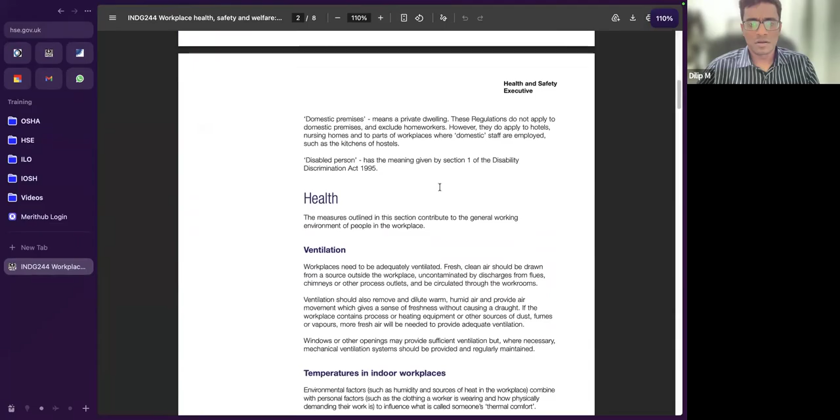Yeah. Welfare facilities are those that are necessary for the well-being of your employees, such as washing, toilet, rest and changing facilities, and somewhere clean to eat and drink during breaks. Okay. I'm just going through, so you are aware what information or what content you can find. So later you can use them when you're preparing the risk assessment.

So toilet and washing facilities. Okay. You have to provide adequate toilet and washing facilities. So what is meant by adequate? So when they say adequate toilet and washing facilities, it means you have to provide enough toilets and wash basins for those expected to use them. Okay. So you don't want people to stand in a long queue to use the toilets or wash basins.

For example, if the ratio of toilets or wash basins is 1 to, let's say, 30. Okay, that would make people wait in a very long queue. Okay, and then where possible, separate facilities for men and women. Okay, the facilities to be clean, and then a supply of toilet paper, and for female employees, a means for disposing of sanitary dressings, facilities well lit and ventilated, hot and cold running water.

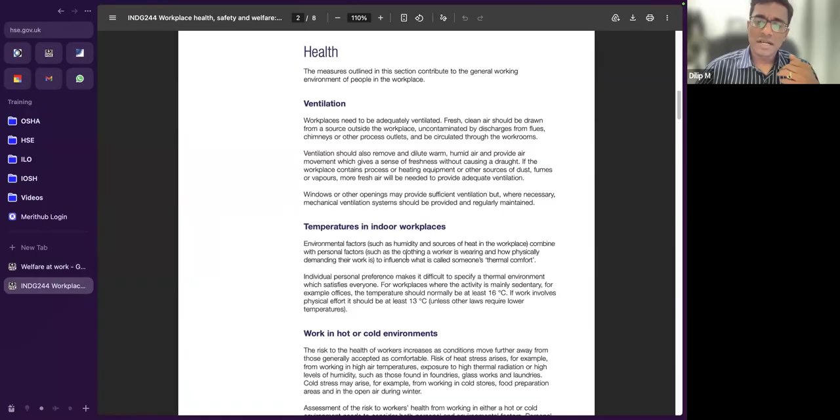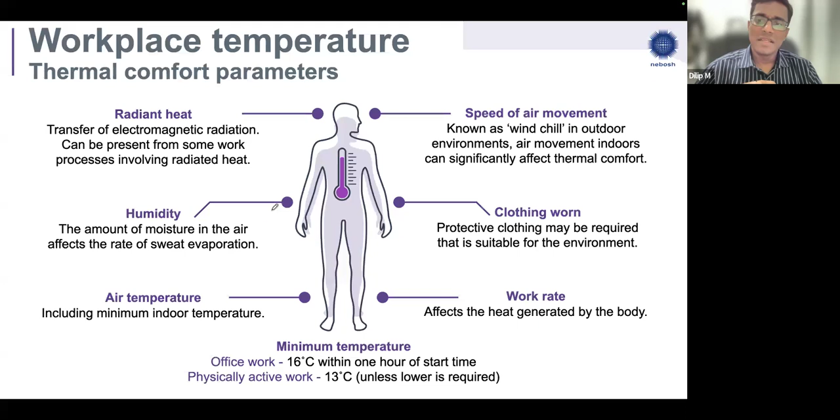Now, there's another document which talks about ventilation, temperatures, lighting, and the cleanliness and workstation and seating. Okay. Anyway, we will come back to this in a moment. So, workplace temperature. People may work in areas where the temperatures could be extremely hot or extremely cold. Examples of hot temperature environment: working in foundries, glassworks, laundries, or working outdoors, constructions during a hot summer. Similarly, a cold environment: working in cold stores, food preparation areas, and in the open air during winter.

So when people work in extremes of temperature, what happens to our body and what are the consequences to our health? Now, the law will not tell you what is the minimum temperature or what is the maximum temperature you should maintain indoor, because the thermal comfort of an individual will vary from person to person. For example, for me, my thermal comfort could be like 22 degrees Celsius. For Vinod Kumar, the thermal comfort could be 18 degrees Celsius. Or for another person, it could be like 25 degrees Celsius. So these thermal comfort varies. Therefore, the regulation does not specify the minimum or the maximum temperature, but it gives you some guidelines.

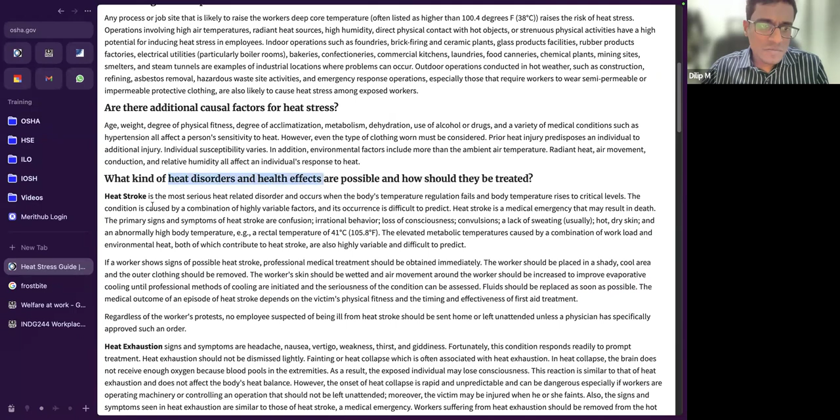So heat disorders: heat stroke, heat exhaustion, heat cramps, heat rashes, heat fatigue. Okay. And looking at the control measures, general ventilation will dilute hot air with cooler air, air treatment or air cooling, and then heat conduction blocking. So simply, blocking the radiant heat through any hot pipe work or any machineries; they must be insulated.

And apart from that, in terms of administrative work controls, acclimatize workers. So we must expose the worker slowly to these increases in temperature. For example, for new workers, where heat levels are high enough to produce heat stress, you may acclimatize with a regimen of 50% exposure on day 1, 60% on day 2, 80% on day 3, and 100% on day 4.

So, for example, on day 1, you expose them to like 2 hours in a working day. And then you slowly increase the exposure, like day 2 or day 3, from 2 to 3 hours, and then 4 hours. But if you immediately expose them to these high temperatures for a longer period of working hours, that would increase the risk. Okay, so that is the meaning of acclimatize. Likewise, when you're exposing them to a cold temperature, you must gradually expose them so their body would adapt to the changes in temperature, and it would reduce the risk of consequences.

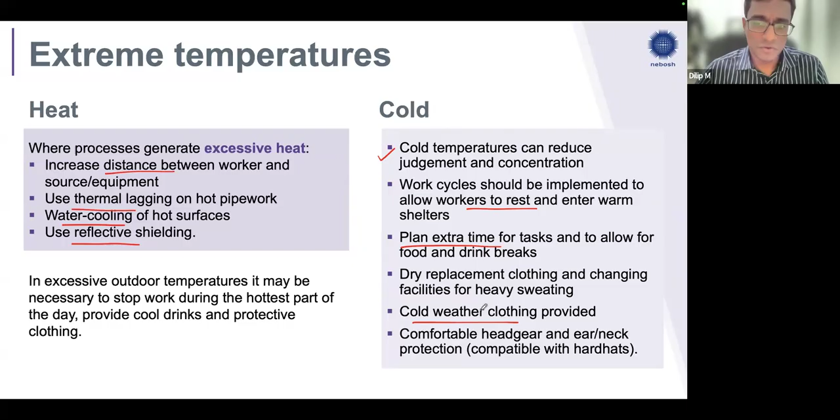Cold weather clothing provided. So provide them with jackets and thick trousers. That would be ideal for a cold temperature environment, and provide a comfortable headgear and ear and neck protection, covering the extremities of the circulatory system: your ears, your nose, your fingers and toes. These will ensure your body temperature does not reduce, and also ensure there is a continuous blood flow.

So training is important whether you're working in a hot or cold environment, because workers should clearly understand the signs and symptoms their body shows from working in a hot or cold environment. Recognizing symptoms that may lead to heat stress or hypothermia. So hyperthermia is a condition where your body temperature increases. Now the opposite is hypothermia, the body temperature reduces. And then being able to perform rescue and first aid measures, and recognize the increased risk of incidents. These are symptoms starting from headache or dizziness, fainting. All these could be considered significant symptoms.

So be aware of the importance of physical fitness. When we talk about physical fitness, good sleep is also a very important requirement. And then the importance of a balanced diet, and the importance of hydration and maintaining the salt level, because you're also losing salt from your body through sweating. And then the effects of drugs and alcohol. So no alcohol, no caffeine, no sugary content, because all this would make you tired, especially when working in a hot environment.

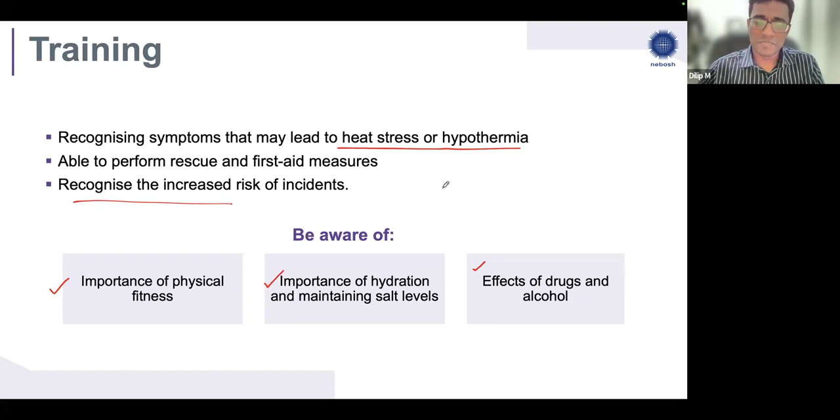Okay, so these are all covered as part of training and providing increased awareness. This would significantly reduce the risk when people know how to protect themselves from exposure to adverse weather conditions. So next is working at height.

Work at height is subject to where there is a risk of fall. Okay, so if there is a risk of fall, and where the fall could lead to a potential harm, then we define it as working at height. So what affects risk from working at height?

Okay, so there are many workplaces or work sectors where work at height is very much a routine part of their work. For example, construction workers would be working on roofs, doing installation or maintenance, or they would use access equipment to gain access to a structure. Okay, so there is significant working at height involved, particularly in the construction sector. So what affects the risk from working at height?

Okay. If you're using access equipment which is poor or unstable... yes, we work at height offshore. Okay. Correct. So any access equipment that you're using, provided it is faulty or unstable, will increase the risk of work at height. Okay. Now, access equipment.

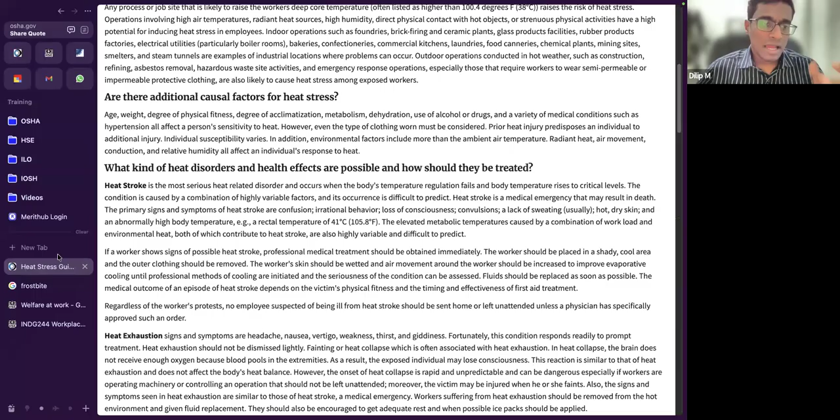Okay. So when using this access equipment, if the equipment is unstable, like think about positioning this equipment on an uneven floor, or where there is a high wind causing the equipment to become unstable, so you fall from height. Okay, so that is one of the risk factors, falling from height where your access equipment is unstable or in poorly maintained condition.

Okay, and then the second risk factor is the vertical distance. Increased height means increased injury risk. So the more the height, the higher the fall distance. For example, a person falling from 3 meters or 6 meters or 10 meters. So the higher the fall distance, the higher the risk of injury. But again, even falling from a 2 meter height could cause fatality. Okay, so vertical distance is another risk factor that affects working at height, and then unprotected edges.

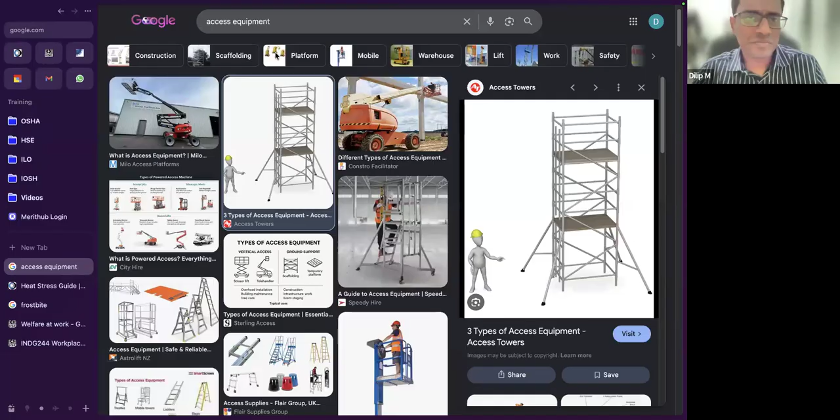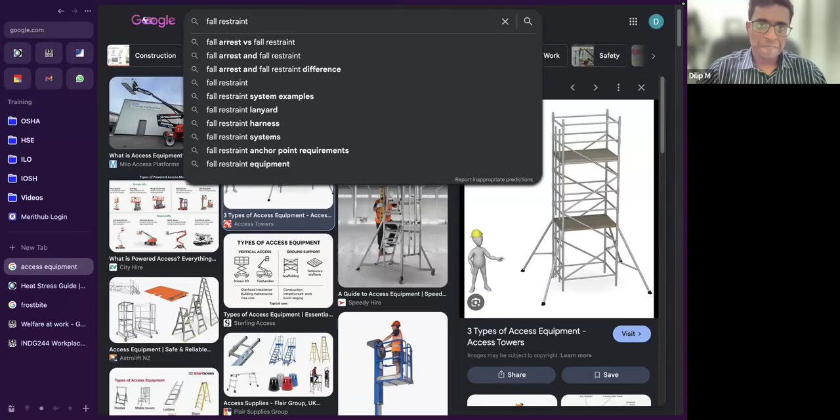Safety harness. Harness is fall arrest system. So this is fall restraint, like the belt. Okay. So you see here, this restraint system or the belt will ensure that you do not access the edge of the roof, because the belt will only provide you access before the edge of the roof. So this is restraint system. Okay.

So you could see in this image, you could clearly see the length of the lanyard of the belt will not make you gain access to the edges of the platform. So this is restraint system. And fall arrest is, it will arrest your fall, which is the harness. So it will not prevent fall, but it would arrest your fall. Again, minimizing the consequences. Okay.

So restraint systems to prevent workers reaching areas with a fall risk. Okay. And working from solid surfaces or roofs with permanent fixed guardrails. And then where preventing fall from height is not possible, the next step is minimize. Equipment that minimizes the distance and consequences of a fall. So where fall prevention is not possible, the next step is how you minimize the distance of the fall or the consequences of the fall.

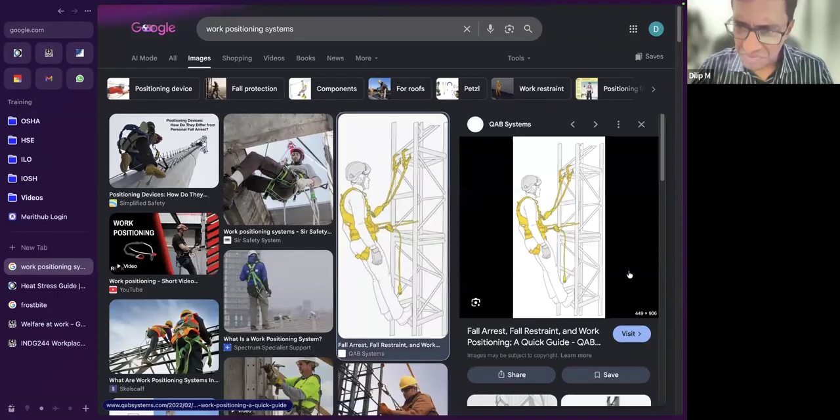Okay, so using fall arrest systems, and then using work restraint and work positioning systems. Now work positioning systems, like where they want to gain access to a long pole, or even for tree climbing. So you could see here, this is the work positioning system. Okay. And then rope access system, very similar to that. So again, you could see

very much used to clean the glass windows of the building. Okay, and also to gain access to any such structure where it may not be feasible through any of the other access systems. And then safety nets, so it provides you a soft landing. Okay, and similarly the airbags. Okay, they do not prevent fall, but they minimize the consequences of the fall by arresting the fall and by providing a soft landing. So with the safety net, there should be a good ground clearance, so that when someone falls on the net it will expand. So that expansion should not hit the ground level.

And similarly, airbags. These airbags are very much ideal where it is a low fall distance, but safety nets could be used for a high fall distance. So all these restraint systems or fall arrest systems or safety nets, they should be subject to thorough inspections and testing so that they are in good condition and they are active when needed.

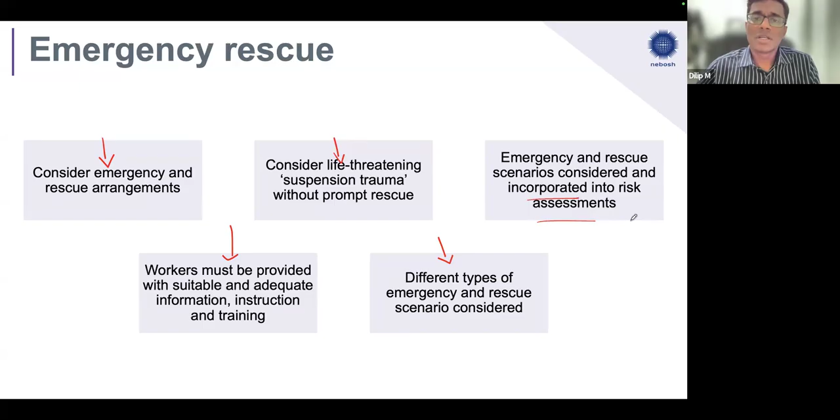Okay, or where the platform collapses and the worker might again be trapped between the platform and the ground. So these are all the different types of emergency and rescue scenarios that should be considered and appropriate procedures to be developed. And these procedures must be incorporated into the work type specific risk assessment. Okay. So provision of training and instructions. Training forms part of the route to competence.

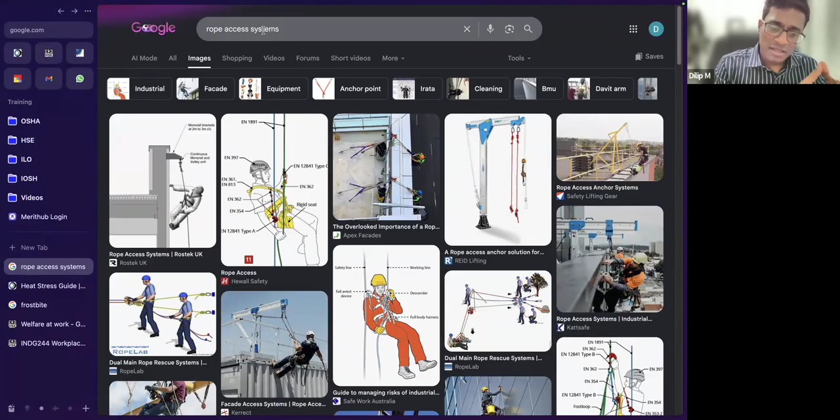Competent people are also required for using different types of platforms, which we would be covering in the next few slides. Different qualifications are available for variations of working at height equipment. For example, rope access, which we saw. Okay, there is a separate certification body for doing this rope access work. Okay, so a different accreditation body, and those people, apart from work at height training, should also be certified for rope access, and only then would they be competent to use these rope access systems.

So different qualifications are available for variations of work at height, and also competency for installation, erection or dismantling of scaffold. Okay, and then instructions must be provided on how to use the equipment safely, and instructions on hazards. So what are the potential hazards of working at height or using such access equipment, what circumstances could cause fall of people or fall of materials, and what is required to ensure that it does not cause harm. So all these are considered as part of training, which provides awareness and increases safety related behavior when doing such risky work activity like working at height.

Okay. All right. So we will take a break. After the break, we will look into different types of access equipment. What are the risks and control measures? Okay. So we'll take a 15-minute break and then we shall resume.

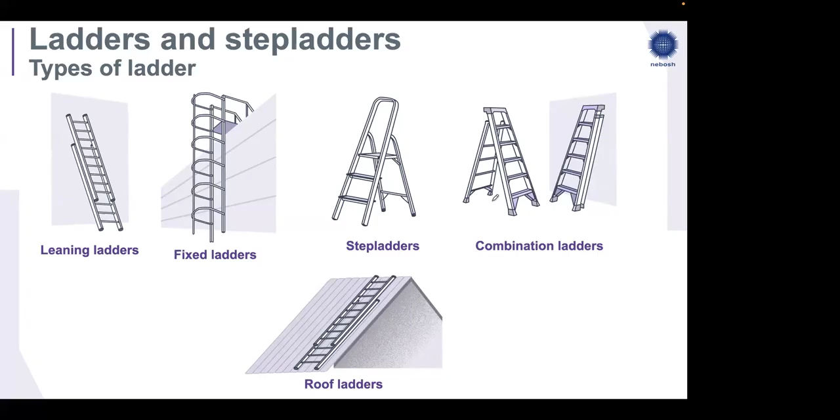Ladders and step ladders. So, types of ladders: leaning ladders, fixed ladders, step ladders, combination ladders, and roof ladders. So, all ladders must be of adequate strength and height. Okay. So, depending on the requirement of the job, they should be of adequate height.

Okay, and suitable for the job, cleaned and grease free, so they do not cause any slippery surface, constructed of appropriate material. For example, if you're working at height on electrical works, then you must not use an aluminum type ladder, and they must be structurally sound, prevented from moving at top and bottom, positioned at a 75-degree angle. So this prevents the ladder from toppling over. Okay. And then placed on a firm, uncluttered, non-slippery surface and suitable for the job.

Okay. So we will go to one of the reference documents on ladders, safe use of ladders and step ladders. Okay, so if you click this link, yes. Figure 1, ladder showing the correct 1 in 4 angle. Okay, so what does it mean when we say 1 in 4 angle? You see here, right? So for every 1 unit out at the bottom, for every 4 units up.

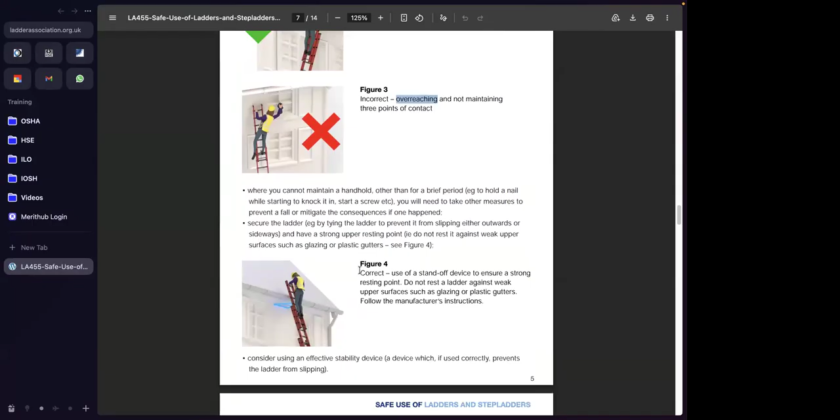Now, again, here you see check all sections are locked before using the ladder, and take care when closing telescopic ladders so your fingers do not get trapped. Okay. Now, yeah, sorry. So here are the safety rules. Only carry light materials and tools. Okay. Do not overreach. Make sure the ladder is long enough or high enough for the task. Do not overload the ladder. Check the pictogram or label on the ladder for any advisory information.

Always grip the ladder and face the ladder rungs while climbing or descending. Okay. Do not slide down the stiles. Rungs are the horizontal part of the ladder, the steps. The stiles are the vertical part. Do not try to move or extend the ladder while standing on the rungs. And do not work on the top three rungs. Okay. So never work on the top three steps of the ladder. They should only be for a safe hand hold.

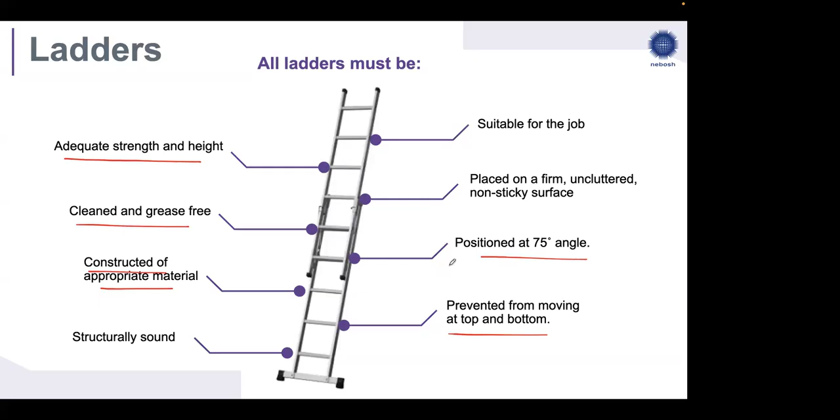Next is scaffolding. Okay. So I'll just show the picture of a scaffolding for those who are unaware.

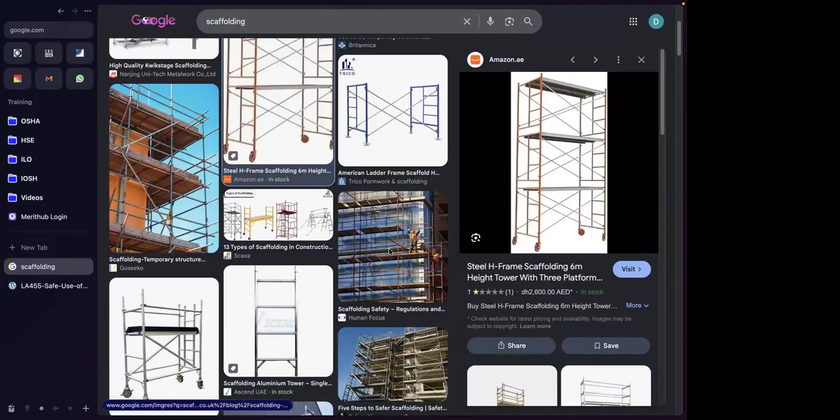So here is an example of a scaffold, which is a mobile scaffold here. Okay. And you also have the independent tied scaffold to the building. Okay. So what is a scaffold and what are its uses?

Now, we can look at the definition of a scaffold from the ILO, from one of the conventions, which is C167. So we go to this convention, I'll copy and you paste it here on your browser. C167 is the Safety and Health in Construction Convention. Now, under part one of this convention, we could find the scope and definitions. So, what is the definition here for scaffold?

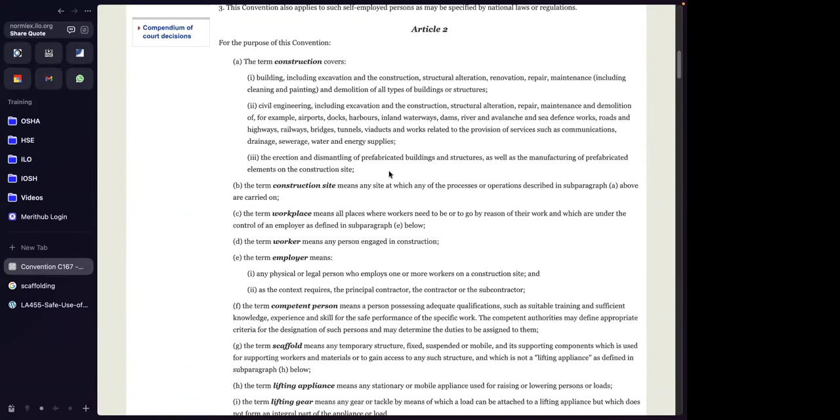The term scaffold means any temporary structure, fixed, suspended, or mobile, and its supporting components, which is used for supporting workers and materials or to gain access to any such structure, which is not a lifting appliance. So a scaffold is not a lifting appliance like a mobile crane or a forklift truck. So this is not a lifting equipment.

So rather, it is a temporary structure, fixed, suspended, or mobile, which is used for supporting workers and materials or to gain access to any such structure. So it is not a lifting appliance. A lifting appliance means any stationary or mobile appliance used for raising or lowering persons or loads, such as the forklift truck or other load handling and lifting equipment.

So with a scaffold, what can go wrong? So the control measures here are they should only be erected and inspected by competent persons to recognized standards. So there are certified people, only those certified people should erect the scaffold. And after erection or installation of the scaffold, they must be inspected, so to tag that it is safe to use.

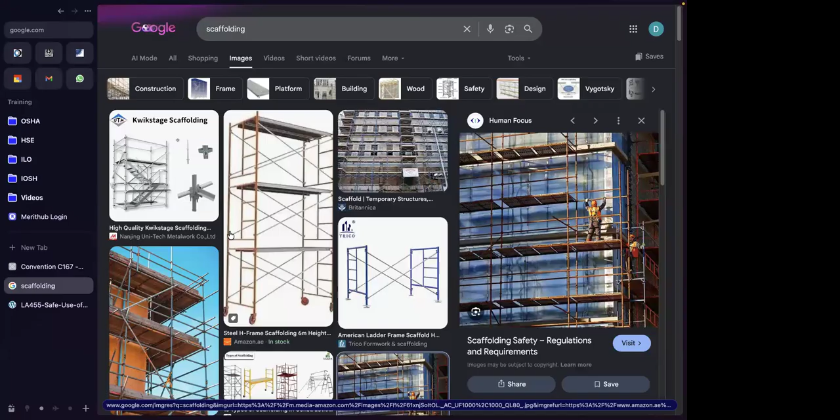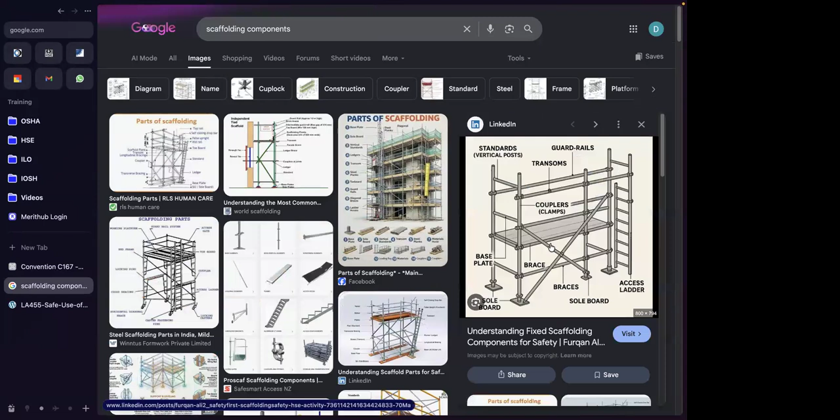They must be footed on firm ground using square base plates and sole boards. Maybe in this picture it's not showing up. So, yeah, you could see here where the standards are resting on the base plate. And then underneath the base plate is the sole board. So the purpose of the base plate is to prevent the standard from sinking into the ground, and the sole board provides even distribution of weight throughout the scaffold.

And you see at the top you have these guardrails. So guardrails and couplers and braces, and so these are the components. So footed on firm ground level. They should not be installed on unstable ground or in a loose soil condition. Must be secured to the building. So the scaffold must be tied to the building to provide more stability for the scaffold.

Sufficiently sized working platform with suitable guardrail. Now, there are different types of scaffold, like light duty scaffold, medium duty scaffold, heavy duty scaffold, depending on the weight that it holds. So where it's a heavy duty scaffold, it can support more weight. That means more workers and more building materials. Toe board in place on the outside edge to prevent material falling, and the scaffold protected against vehicle collisions.

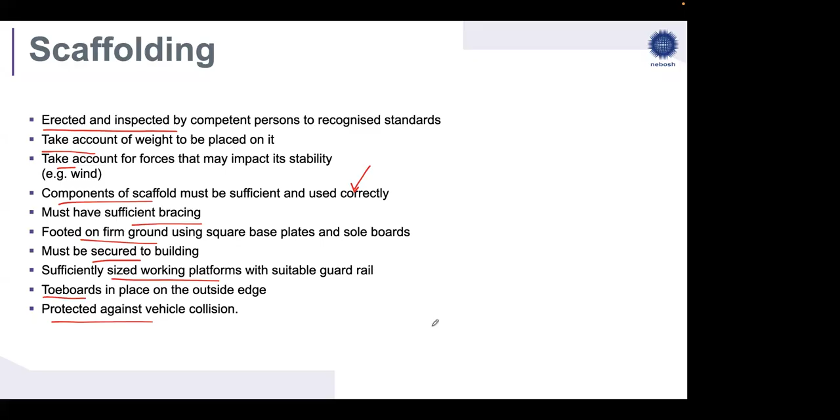So these are the controls we would write in column 3 and 4 if we write about scaffold in a hazard description. So, independent tied scaffold. These are freestanding of the structure to which they provide access. So they are tied to the building, and the structure bears none of the scaffold weight but is secured to the structure for stability.

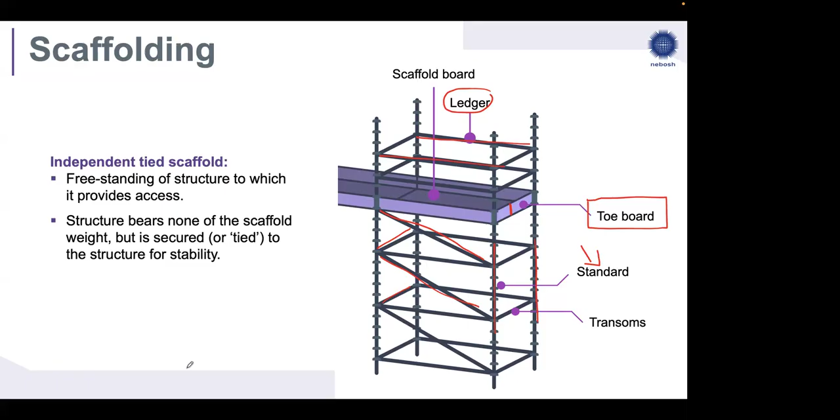Next is mobile tower scaffold. So mobile means the scaffold, the tower, can be moved. So they have wheels. These are movable tower scaffolds, very much used for light duty work, like for building maintenance jobs, for installation, or for cleaning purposes they use this mobile scaffolding.

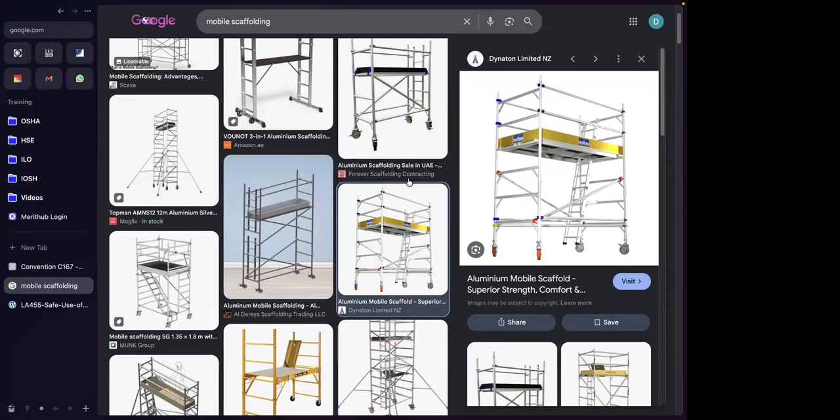So an outrigger is a type of extended support you see in this picture. These are called outriggers. They extend the foot support. So this provides stability for the scaffold. By increasing the dimension of the base, we are increasing the scaffold stability. Where outriggers are required, they must be provided.

Wheels locked when in position to prevent unintended movement of the wheels when people and material are on the tower. Tower should not be moved when persons or equipment are on it. Reduce to 4 meters or less in height before moving. Check for overhead obstructions. Access ladder integral to the tower, provided with a hinged bar, gate, or hatch door for access.

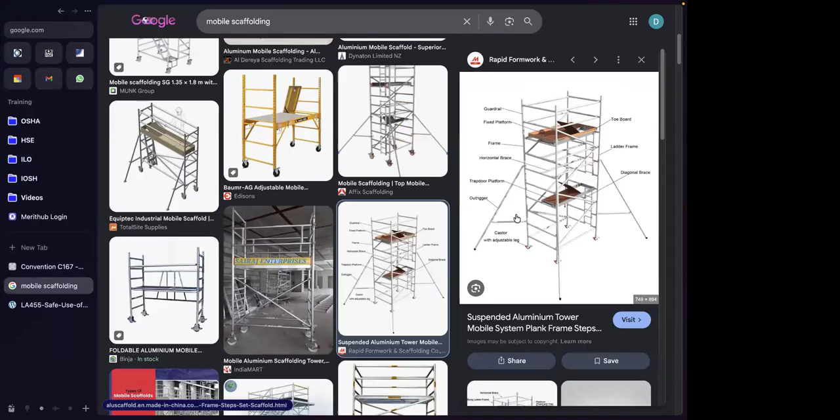So you may have seen here in the previous image, you could see the access ladder inside of the tower. Or if there is no proper access ladder, then you should climb from inside of the tower and not from outside of the tower. Avoid overloading. Safe working load must never be exceeded.

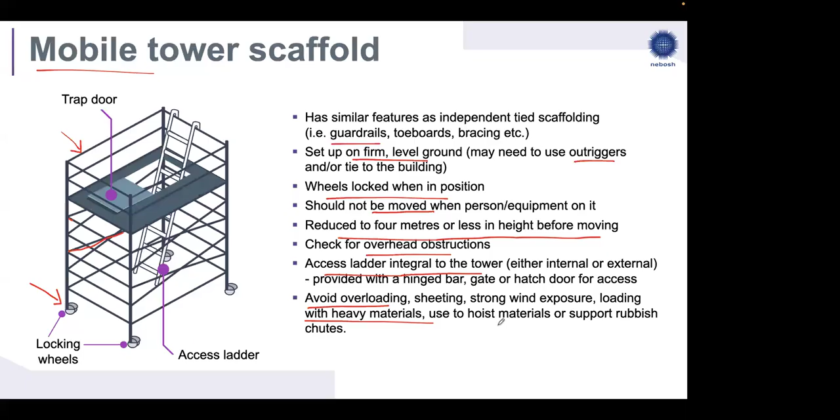And then sheeting, strong wind exposure, avoid loading with heavy materials, avoid use to hoist materials or support rubbish chutes. So they are separate or independent tower scaffolds. They must not be used to lift or hoist materials or to support rubbish chutes. So if I type mobile scaffold,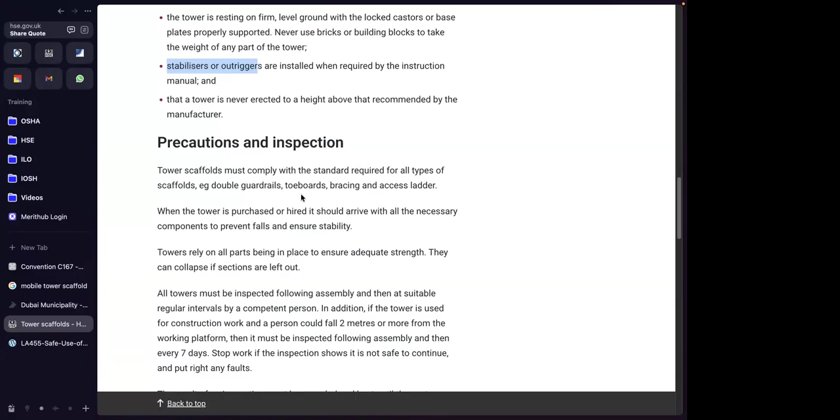For stability, outriggers, and requirements of inspection of the scaffold before, after installation, or after any event that may have impacted the stability of the scaffold. So every 7 days, they must be subject to inspections. And if you're using it, what are the precautions to be taken? Or when you're moving the tower, what are the precautions?

All right. So next is MEWP, which is mobile elevated work platform. This is a scissor lift, boom lift. So these are either vehicle mounted or independent. Normally they use a boom, articulated or telescopic, or a scissor mechanism to lift the work platform.

So the precautions when using these MEWPs: they must be suitable for the task. So they should not be used where access may not be able to be gained. They must be set up on firm ground, so even level ground, no loose soil, no overstretching while on the MEWP. Identify and avoid overhead obstructions so you do not make contact with any overhead obstructions during movement or during the lifting process. The equipment must be maintained and kept in good repair.

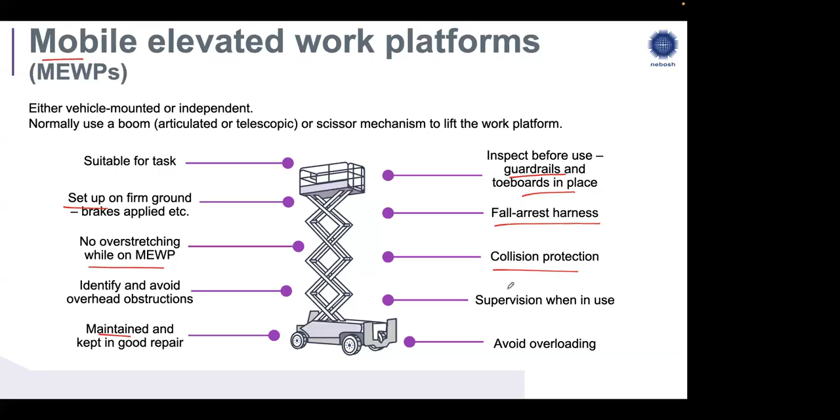So they must be subject to thorough inspections and examinations, and also a pre-use check before using the equipment. So inspections before use, checking your guardrails and toe boards are in place, which is the significant form of fall protection. Use of fall arrest harness, collision protection, so creating a safe buffer zone around the MEWP working area. Supervision when in use and avoid overloading. So the controls are included in columns 3 and 4.

So what are guardrails? Guardrails are a requirement when working at height. So the height of the guardrail should be sufficient to prevent falls. Now, different standards specify a different height for the guardrail. So approximately around 95 to 100 centimeters, we could say approximately 1 meter high, that is high enough to prevent falls. So local codes and standards normally describe the dimensions of guardrail safety features.

And then maintenance operations should be carried out according to strict procedures. And excavation work alongside pedestrian traffic routes should also be suitably protected. So where people may fall into the excavated pit, they should also be provided with guardrails. Now, looking at the search.

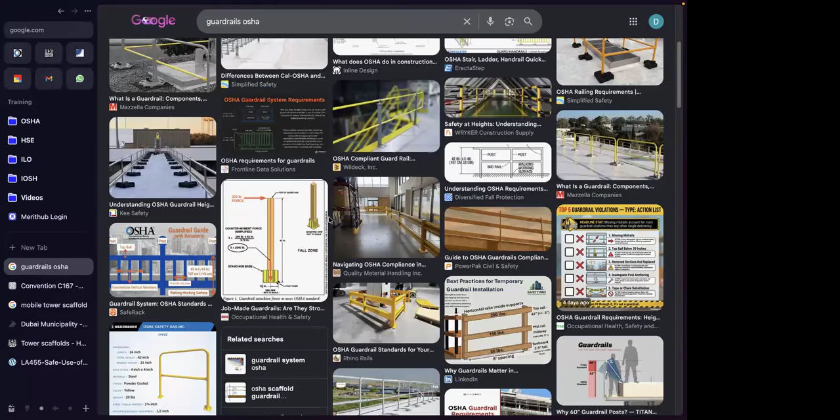Okay, so I'm just searching with OSHA. Okay, so you can see here: the top edge height of top rails or equivalent guardrail system members is 42 inches. So the height of the top rail is 42 inches plus or minus 3 inches from the platform.

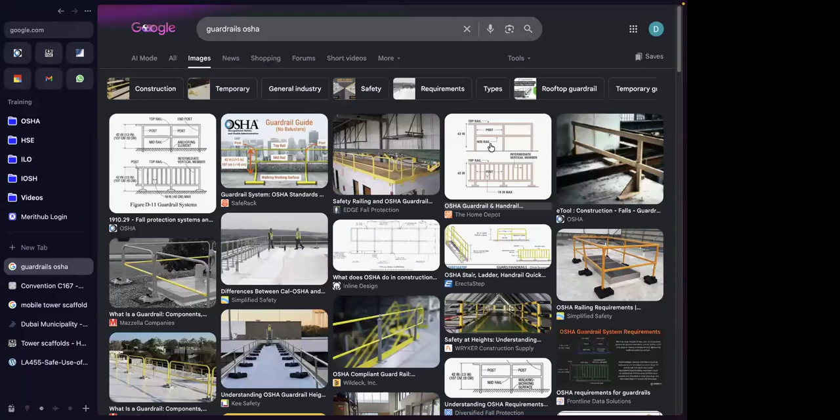And then you have the mid rails. Mid rails should be at least 21 inches high, and mid rails are installed at a height midway between the top edge and the walking-working surface. So you can see the top rail and mid rail. For example here, this is the top rail and this is the mid rail, and at the bottom you have the toe board.

The height of the top rail from the platform ground level is 42 inches plus or minus 3 inches, and the toe board is 10 centimeters or 4 to 5 inches, so that should be tall enough to prevent any objects falling from height. And there are also requirements that specify what the gap here should be. This gap should not be large enough for a person to fall through.

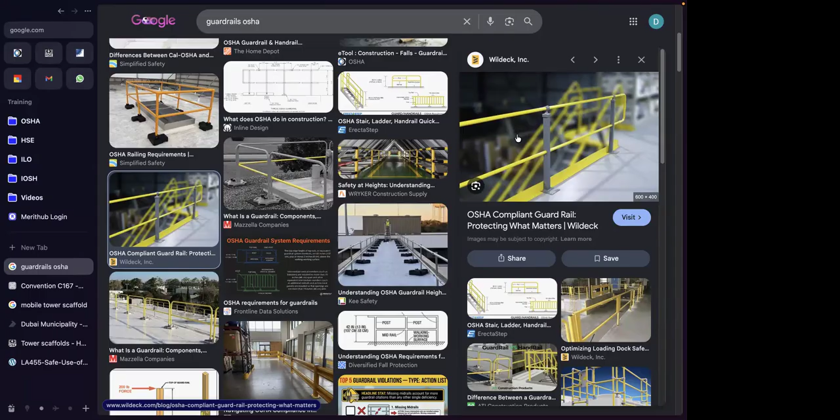So for your risk assessment, you're not going to specify the technical measurements, but if you are working in such sectors, then please refer to your local standards.

Okay. Okay, I did not include. Yeah.

All right. So we will conclude with 8.1 and 8.2. Tomorrow we will run through the remaining 8.3 to 8.7. These are very short learning outcomes. So we will complete this, and then we will complete one learning outcome of element 9. Then Wednesday, we'll complete the remaining learning outcome of 9, and cover half of element 10. By Thursday, we will be completing the 11 elements of GC2, so the syllabus part. And on Friday, we'll do a quick review on the second paper.